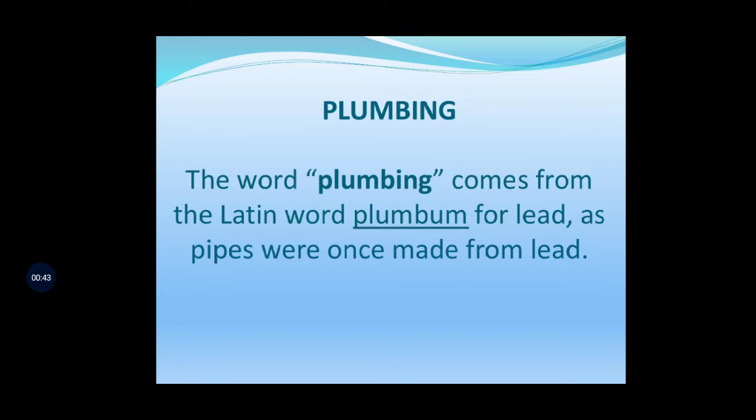Friends, today we are going to learn the chapter Building Services. In Building Services, the first point we'll cover is plumbing services. What is meant by plumbing? How did this word come into the picture? The word plumbing comes from the Latin word plumbum. It is used for lead, as at that time the pipes were made using lead. So from that word, the plumbing word came into the picture.

Then what are plumbing services? Plumbing services include services like water supply, drainage, sanitation, and maybe gas supply required for the building. In all buildings, in order to meet the needs of occupants, adequate water must be available. Further, the water needs for fire protection, heating, and air conditioning must also be met. Before designing a building, water needs must be computed.

Studies should be carried out to determine the availability of sufficient quantity of water from sources like public water supplies, groundwater, and surface water. Generally, public water supplies furnish suitably treated water. However, ground and surface water may require treatment in the building before its distribution for human consumption. Transmission and distribution of water for a building is generally made through pipes which may be run underground or above ground.

The water used in a building changes into wastewater. This wastewater is collected in fitments and receptacles of special design. The water so collected is then conveyed through drain pipes by simple gravity to join the municipal sewers laid underground under the street. The water conveyance system is comprised of branches and a sewer laid sloping to obtain self-cleansing underground.

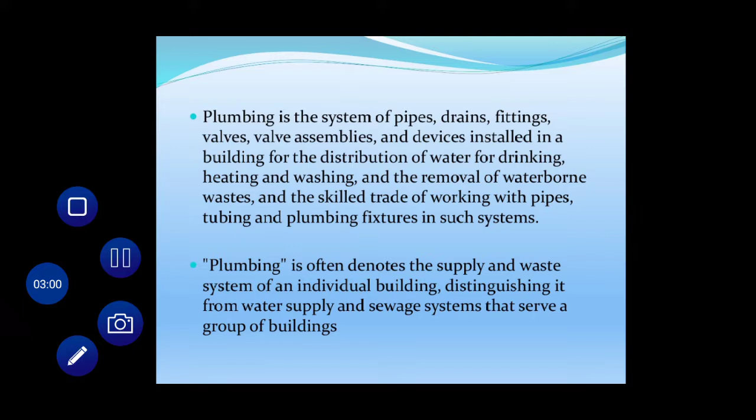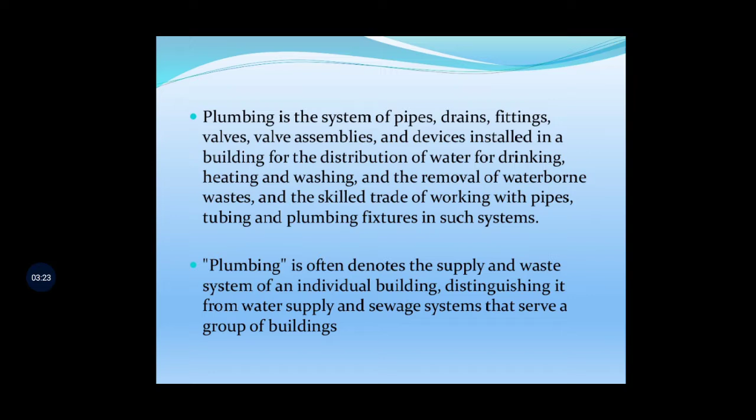The conveyance system is also provided with underground chambers like manholes and other appurtenances like gully traps, grease traps, various types of traps, ventilating pipes, etc. So, in short, plumbing is the system of pipes, drains, fittings, valves, assemblies, and devices installed in a building for the distribution of water for drinking, heating, and washing, and the removal of waterborne waste, and the skilled trade of working with pipes, tubing, and plumbing fixtures in such systems. This is plumbing.

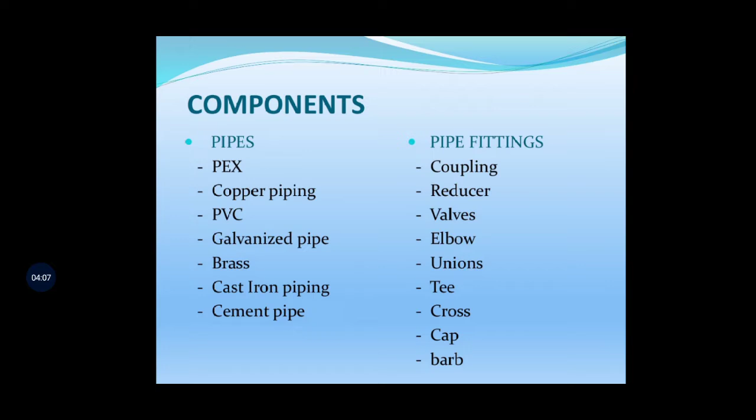Moving ahead, the components of plumbing. The first one is pipes. Pipes are of different types: PEX, copper piping, PVC, GI pipe, galvanized pipe, brass, cast iron, cement pipes. And when pipes come into the picture, we require a few fittings also to create ease in the plumbing system. So there are couplings, reducers, valves, elbows, unions, tees, crosses, caps and barbs. We see the next slide.

Pipe. What is a pipe? A pipe is a hollow cylinder following certain dimension rules. As I said, the pipes may be of cast iron, reinforced concrete, pre-stressed concrete, mild steel tubes, copper, brass, asbestos cement, lead, polyethylene, polyvinyl chloride. We call it PVC. These are the different types of pipe.

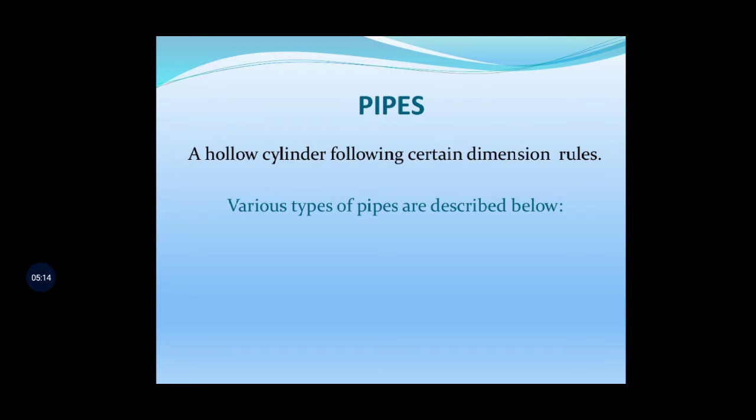In systems where extremely corrosive wastes are not expected, cast iron is the most common piping material. We'll see them one by one. Stoneware pipes are mostly used for underground work, while CI and AC, asbestos cement pipes, are used for above ground work. So, as per the purpose and the conditions, we have to select the type of piping. We'll go ahead. First we'll see the PEX pipe.

PEX pipes. What is PEX? These are flexible plastic piping, a popular selection in residential and small business applications. Nowadays this is commonly used. It has a slightly higher initial cost, but minimum maintenance and a fast installation process. It is a leak-free product offering an advantage over copper piping.

This cannot be used in outdoor applications as UV rays can damage its outer plastic layer. So, for a piping system around the building which is open to the sun, we cannot use PEX pipes, because the UV rays can damage the plastic layer of the PEX pipe.

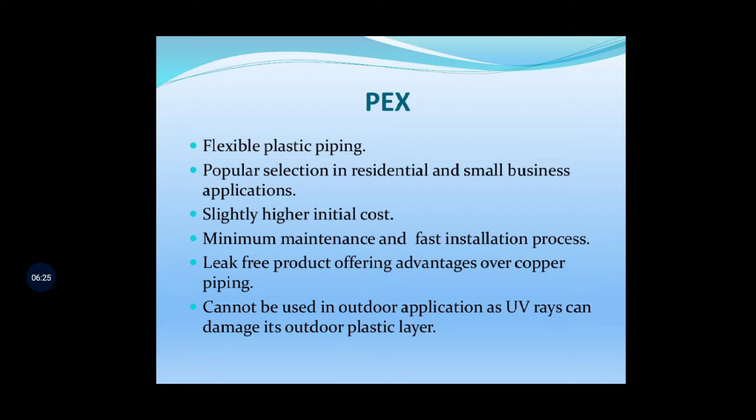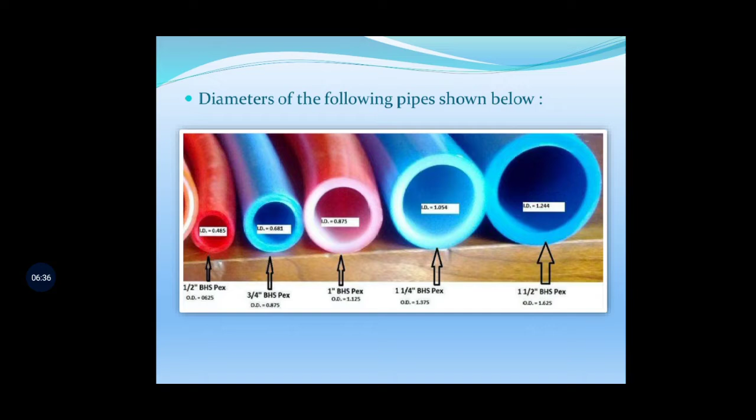This is the picture which shows the different dia. As per the different dia, pipes are there. So these are the PEX pipes. All these are the PEX pipes.

Next one is copper. Generally copper piping is suitable when you want the hot water supply or cold tap water. In that case, copper piping is most often used for supply of hot and cold tap. Means alternate: sometimes we need hot water, sometimes we need cold water. In that case, copper piping is used. And as a refrigerant line in HVAC system, heating, ventilation, and air conditioning system, here also we can use these pipes.

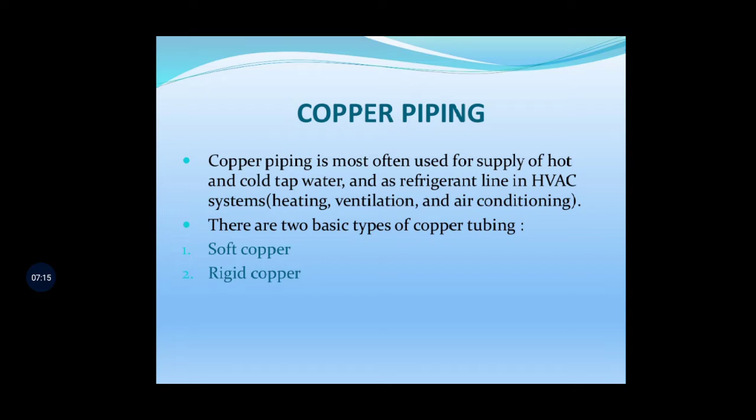So there are basic two types of copper tubing: soft copper and rigid copper. Soft copper pipes, these are ductile. These are the ductile copper tubing. This can be bent easily to travel around obstacles in the path of tubing.

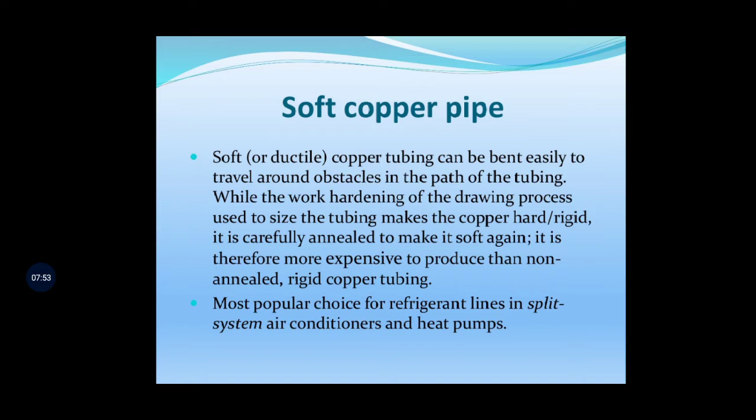While the work hardening of the drawing process used to size the tubing makes the copper hard, rigid, it is carefully annealed to make it soft again. It is therefore more expensive to produce than non-annealed rigid copper tubing. Most popular choice for the refrigerant line in a split system, air conditioning and heat pumps.

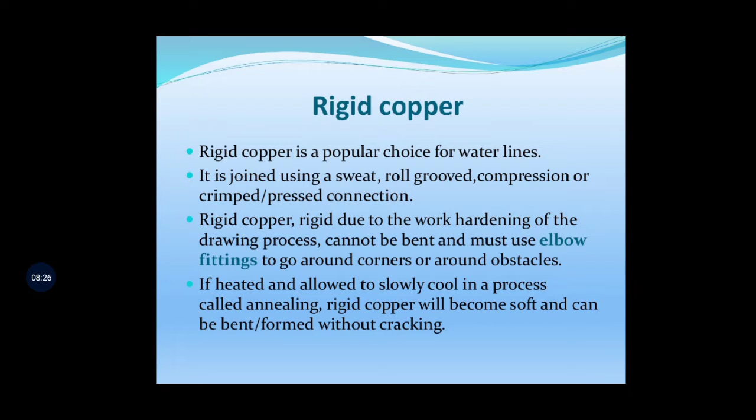Rigid copper. Rigid copper is a popular choice for water lines. It is joined using a sweat, roll grooved, compression or crimp pressed connections. Rigid copper is rigid due to the work hardening of the drawing process. This cannot be bent and must use elbow fittings to go around corners or around obstacles. If heated and allowed to slowly cool in a process called annealing, rigid copper will become soft and can be bent or formed without cracking.

Next type of piping is PVC. PVC full form is polyvinyl chloride. Polyvinyl chloride. So this is also used for hot as well as cold potable water. Potable water means water which can be easily used for day-to-day activities like drinking, washing, etc.

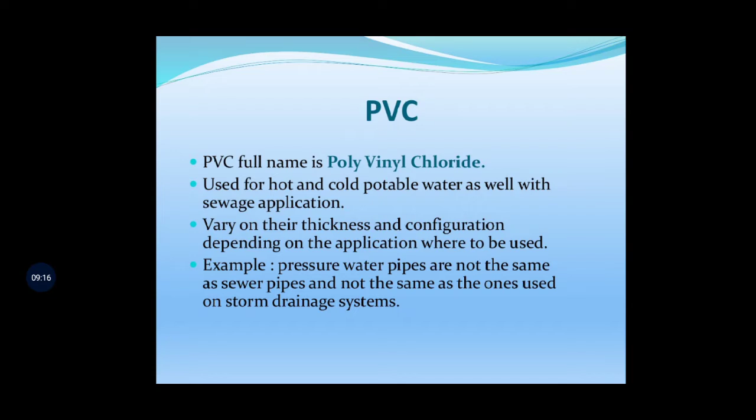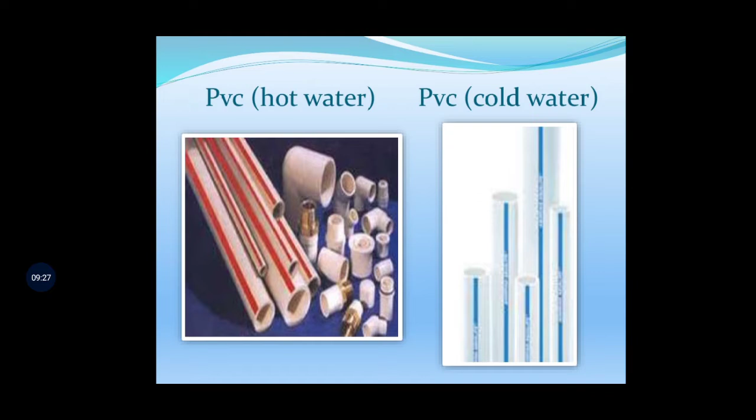So the thickness and configuration of these pipes depend on the application where they are to be used. Example: pressure water pipes are not the same as sewer pipes and not the same as ones used on storm drainage system. So this picture shows PVC pipes. Left one shows the PVC for hot water and right one shows the PVC for cold water.

Next one is GI galvanized pipes. Use of these pipes is from several years ago. Less frequent use now because they can rust, means rust problem is there. So if pipe is old, water coming from the faucet with rust traces can be seen.

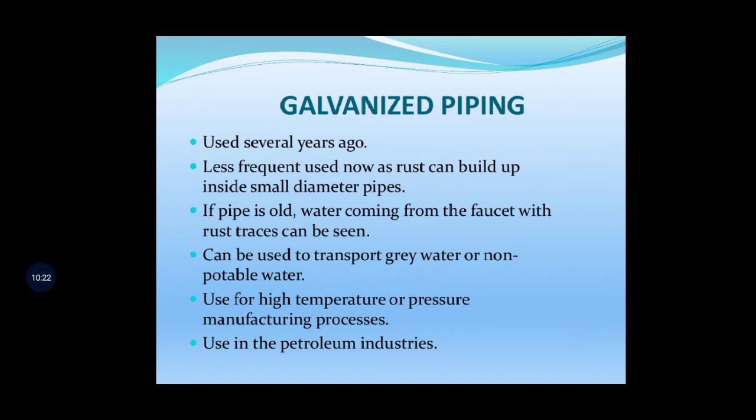Then next one is brass. What is brass? So brass is an alloy made of copper and zinc. Using copper and zinc, brass is produced. The proportions of zinc and copper can be varied to create a range of brasses with varying properties. These pipes provide great rust resistance. It has great rust resistance. These are made of 67% to 85% of copper and rest is zinc.

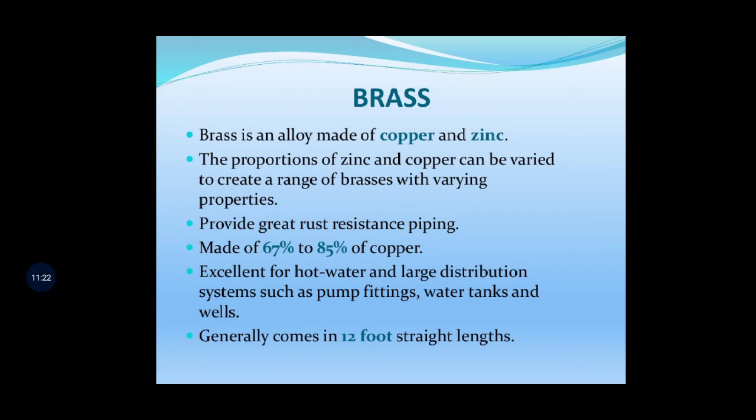Next, the pipe fittings. Till now we have covered the types of pipes. Now we'll see the pipe fitting. What is fitting? Fitting is used in pipe plumbing system to connect straight pipe or tubing sections, to adapt to different sizes or shapes, and for other purposes such as regulating or measuring fluid flow.

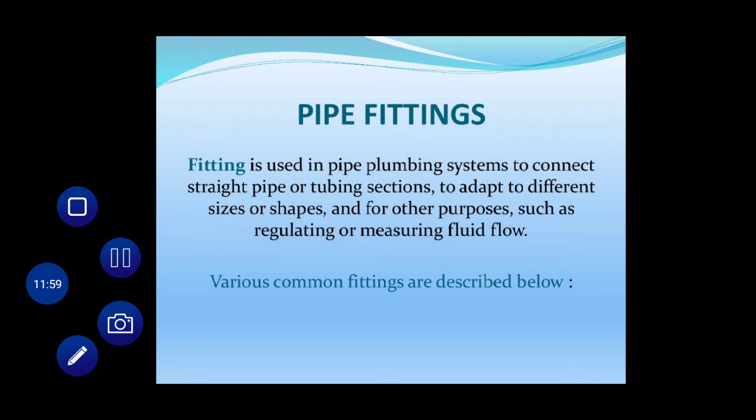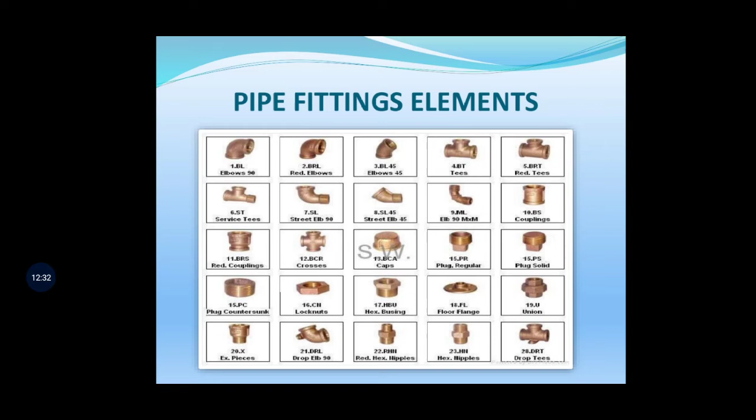Let's see different types of pipe fitting. Here the picture shows the different types of pipe fittings available. Here elbows are available, tees are available, couplers are there, unions are there. We can see the different pictures here. Cross is there, couplings are there, plugs are there, caps are there, floor flanges are there. All types of pipe fitting elements are available in this picture.

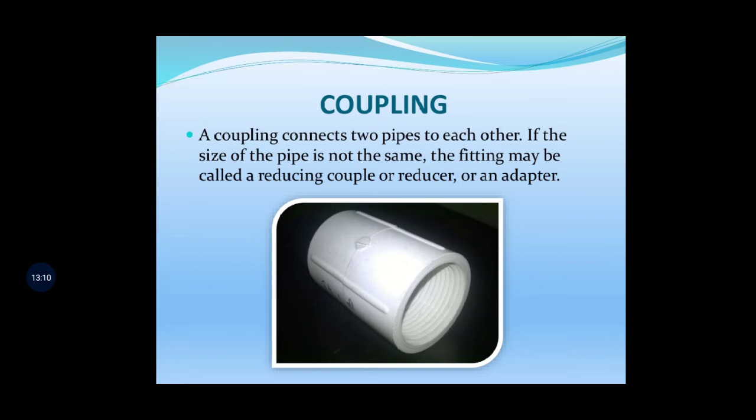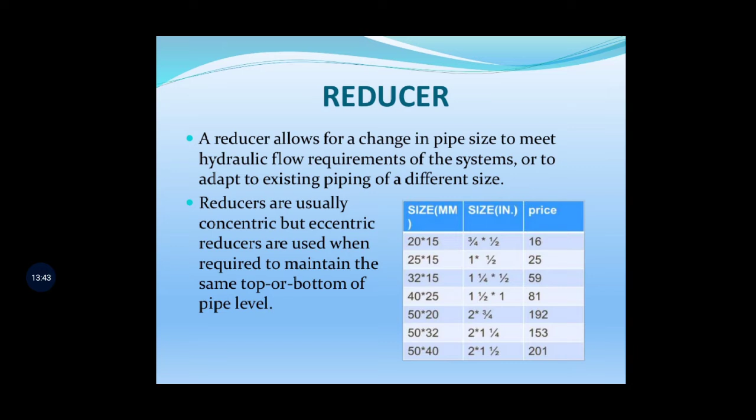Next is reducer. As I said, reducer allows for change in pipe size to meet the hydraulic flow requirement of the system or to adapt to existing pipes of different sizes. Reducers are usually concentric, but eccentric reducers are used when required to maintain the same top or bottom of pipe level.

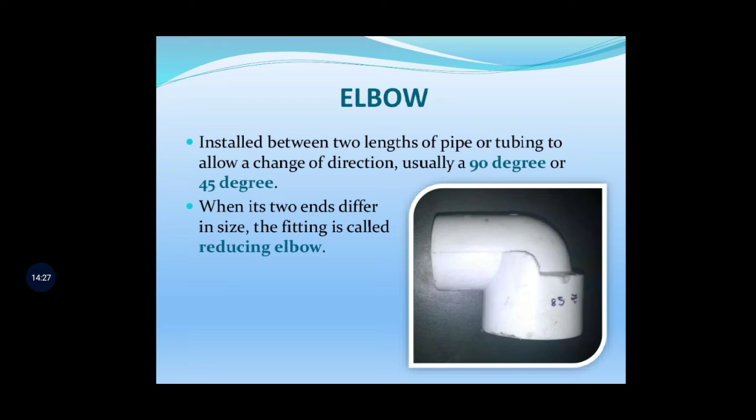This is the picture of elbow. Elbow means when we want to turn piping system in 90 degree, the elbows are used. These are installed between two lengths of pipe or tubing to allow a change of direction, usually 90 degree. Few elbows are also available in 45 degree. When its two ends differ in size, the fitting is called as reducing elbow. Normal elbow has the same size, but if one pipe diameter is different than the other one, then it is called as reducing elbow.

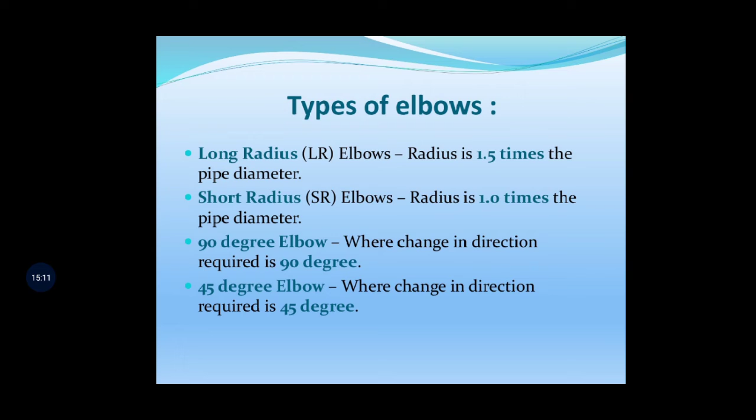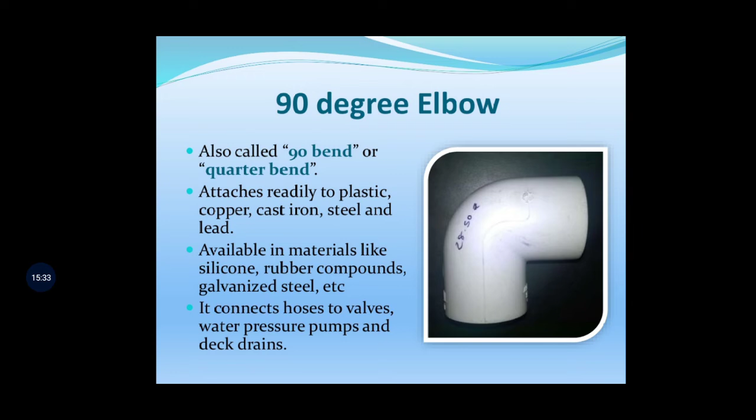Simple. So this is 90 degree elbow, called 90 bend or quarter bend also. It attaches readily to plastic, copper, cast iron, steel and lead. Available in materials like silicone, rubber compounds, galvanized steel, etc. It connects hoses to valves, water pressure pumps and deck drains.

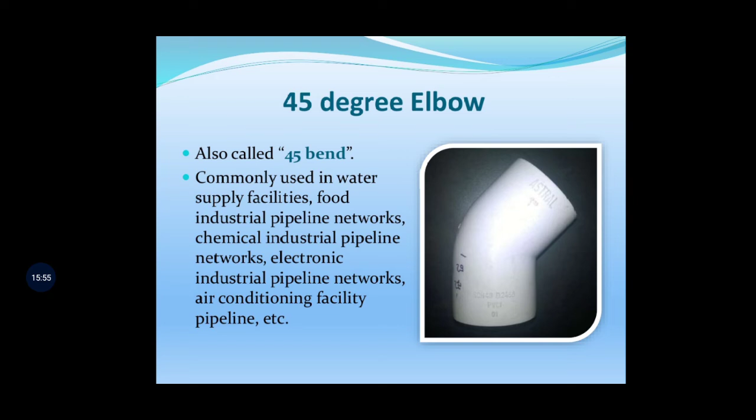45 degree elbow, also called as 45 bend, means when we want to change the direction of piping system in 45, so it is called as 45 bend. This is commonly used in water supply facilities, food industrial pipeline network, chemical industrial pipelines network. So applications are different.

Now we'll see the union. Coupling and union appear to be same, but what is union, difference between coupling and union, that we'll see. Union is similar to the coupling, except it is designed to allow quick and convenient disconnection of pipes for maintenance or fixture replacement. Standard union pipe is made in three parts consisting of nut, female end and male end. When the female and male ends are joined, the nuts then provide the necessary pressure to seal the joint.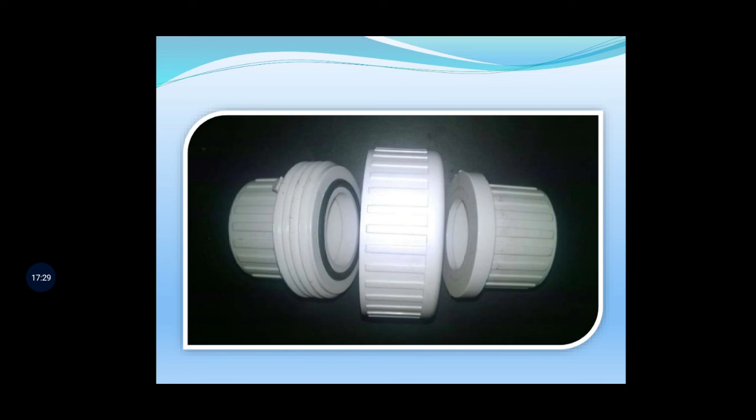Next one is T. T is available with all female thread sockets, all solvent weld sockets, or with opposite solvent weld sockets and a side outlet with female threads. Used to either combine or split a fluid flow. T shape having two outlets at 90 degree to the connection to the main line. It has two outlets used for connecting pipe of different diameters or for changing the direction of pipe runs.

Extensively used in pipeline network to transport two-phase fluid mixtures. So when we want to mix two different fluids together, here the T's are preferred.